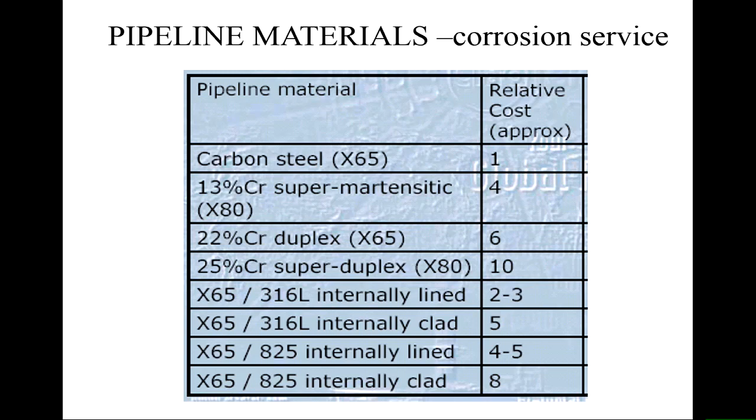So for summary, for the materials development, for UOE pipe, which I'll talk about later on today, steel metallurgy and plate rolling techniques have improved so that we can now produce routinely good quality pipe at X80.

And there are some X100 out in service as well, with excellent toughness, good weldability, and that's normal.

So the last pipeline jobs that were commissioned in the UK for the main gas distribution network around the country, so we could move gas from the ports to where it was being used, those were all commissioned in X80.

Previously, most of the pipes have been commissioned in X65, so we are moving to that grade. However, we don't have much use of anything more than X80.

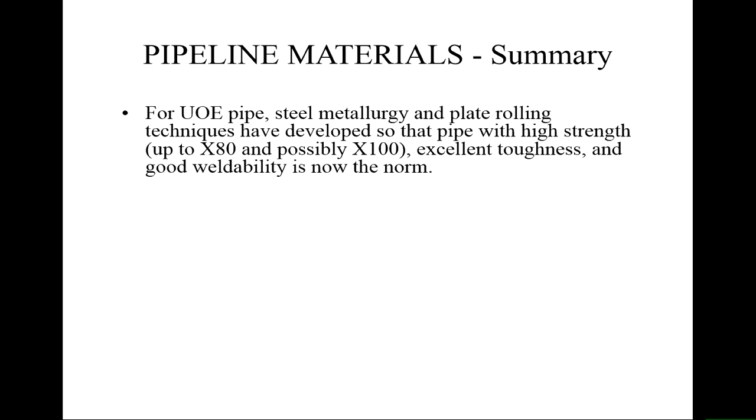I know in Canada and in Japan there are small lengths of pipe with higher specifications, but this is more on the trial stage.

Seamless pipe, quenched and tempered, gives you good high strength pipe for sour service, and you can get good supplies nowadays. The problem with the seamless pipe was always making sure that the pipe wall thickness was uniform.

And because of the way of manufacturing it has been improved, we've got better quality round pipes with good properties, and we'll talk a bit more about that when we talk about the pipe manufacturing route itself.

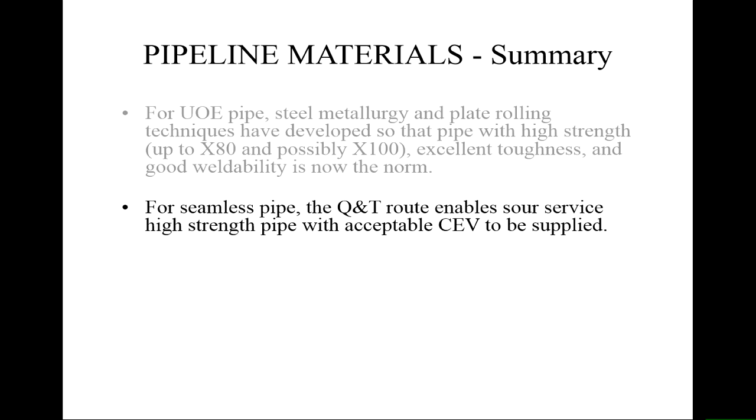High frequency welded pipe, not so much in the way of development, but certainly the grades up to 65 are pretty good. X65 is pretty good.

It's usually used for smaller diameter, thinner wall pipes.

High frequency welded pipe is incredibly widely used in the water industry for the plumbing pipes for distribution of potable water. So copper pipes for the radiators that you can see there will be made by high frequency welding from a sheet.

But it is used in some cases for gas and for oil: spiral pipe. We've got hot rolled and water quenched strip with good strength up to X80, and we can make pipe with good toughness, and we don't have a seam that goes along the length of the pipe. We have a seam that goes on the spiral, which sometimes is useful for addressing that long running crack issue.

So now good quality supplies are available, and it's really looking at how the suppliers have developed the quality control in their process, which dictates whether or not you might choose this.

So again, there are materials that need to be developed, there are manufacturing processes that exist, and there is a quality issue of how well you do that manufacture.

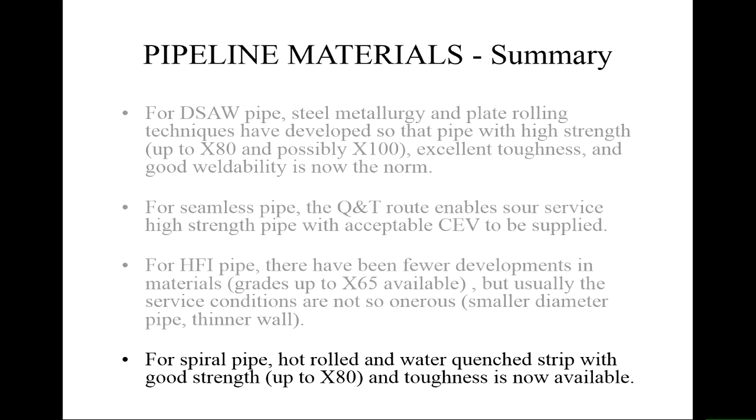So that was sort of the materials development summary. What I want to really talk about today is pipe manufacture.

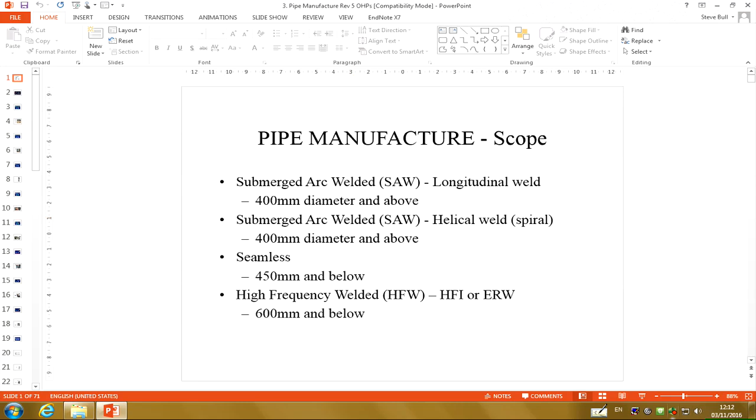So we've got good quality material in strip form, plate form, in billets. How do we turn that into a pipe?

I'm going to talk about submerged arc welded longitudinal weld pipe, helical pipe again by submerged arc welding, seamless pipe, and high frequency welded pipe, either high frequency induction or electrical resistance welding. And these have different uses, largely due to the diameter which they're set up for.

So if you know what the size of your pipe, the diameter is going to be, it sometimes chooses for you which process of pipe manufacture you'll use. But if we've got pipes around 400 millimeters, nearly everything can be used.

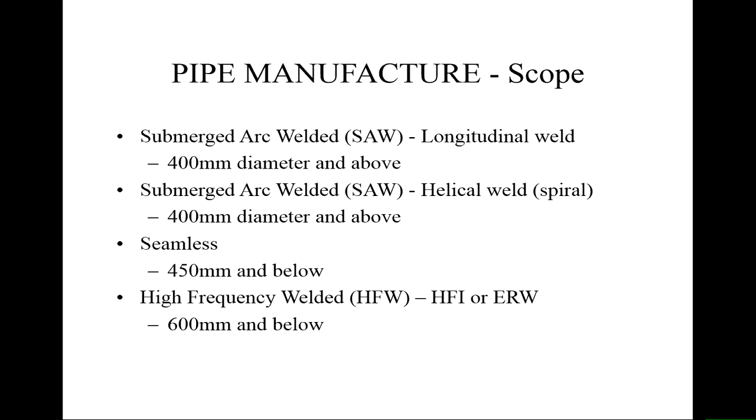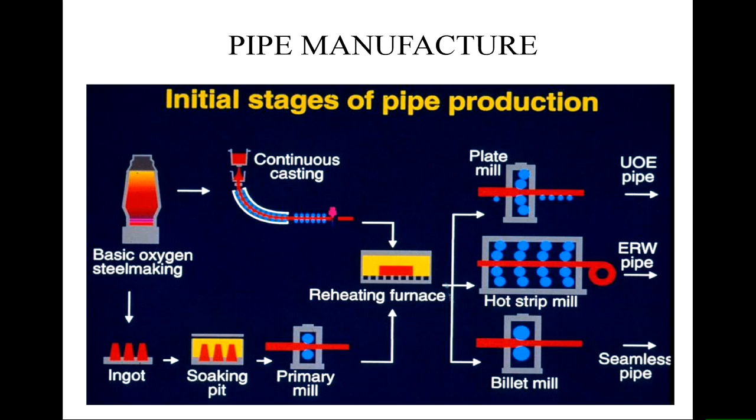So the most common pipe process, certainly for the pipes that we use in the UK, and has been around for a long time, is what we call the UOE process.

And the U and O are indications of the shape that a sheet of metal is put to in order to make a pipe. So we take a basic sheet and we bend it into a U shape, and then we make a full cylinder, that's the O shape. And E stands for expansion. So once it's been welded, we then expand that to plastically deform it a little bit to make it rounder and to generally improve its properties, check that the welds are okay.

So plate comes in from your steel supplier, which has been rolled to the right thickness, and has been hot rolled, cross rolled, and then controlled rolled. So you've got plate with the right mechanical properties for the pipe.

It then goes into an edge planing system where we try to make sure the edges are absolutely perpendicular to the surface, so that we can line them up. If we make it into a tube, they've got to line up perfectly.

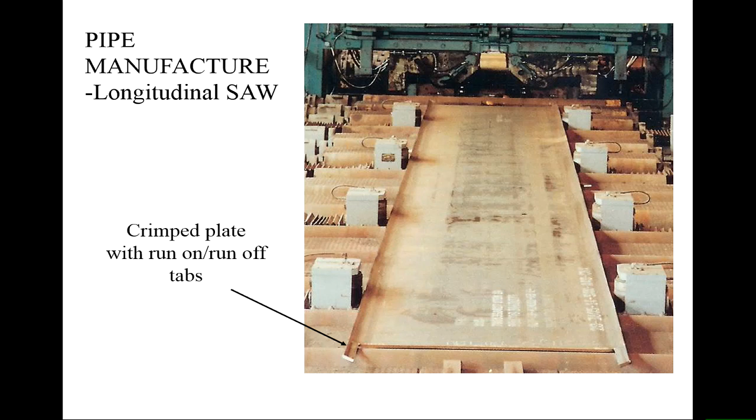Okay, so we've gone through the plate, the edge planing and edge crimping. We're now going to talk about the U-ing process.

So here is the tool, a circular tool, with a flat sheet of steel, in a very long press, 12 metres or 18 metres long. The tool comes down onto the surface and presses, and you get the U shape formed. You can see the runoff tab that's there.

So those two sides should be parallel now. They started off flat and then you've shaped them so it's a U shape. And then you take that tool out, and there's a bit of spring back.

So what happens is when you push it down, there is a recess here, which is the other part of the press. When you push it in it makes this sort of shape, and then when you release it, it springs outwards a little bit because you get a little bit of elastic deformation as well as the plastic deformation. So this tool here is undersized compared to the internal diameter of the pipe.

And you will allow it to spring open a little bit afterwards. And the stronger we make the pipe, the more it springs back, the more we have to change the size of the tool to get the right size.

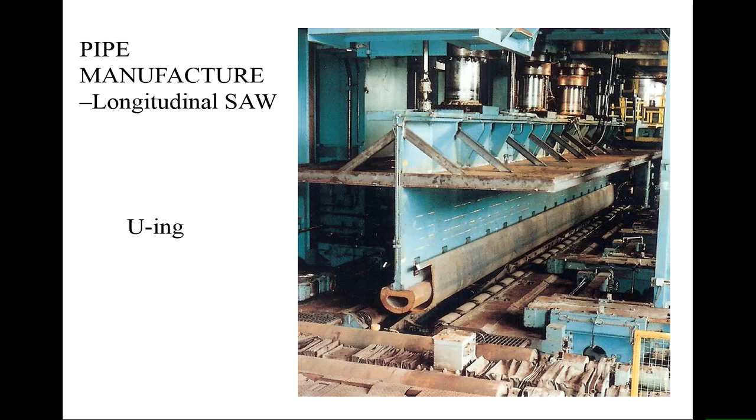So we've made the U shape, but that's only half a pipe. We need to make it into the full pipe, so this is the O press. You're looking along the end here. This is the U-shaped pipe, and the press has just started to actuate.

You can see the runoff tabs here. You're pushing those surfaces inwards, and you can see the crimping is necessary. Lifted that up to make sure this fits inside the tool and will slide round to make the shape. As we push these two halves of the press together, you can see we're getting a more circular shape.

It's going to an O shape, and the edges have come right together at the top here. On the final press, when it's completely closed, this pipe should fit tightly all the way around inside the press. We've got perfect registry here, so no overlap, no angles or anything like that. Of course, when you release that press, there's a bit of spring back, and it'll open up a little again, but under load it should have the perfect O shape in cross section.

So inside the press, is there any temperature? No, this is cold. Cold. You've worked very hard to get thermomechanically controlled rolled steel with good properties, and if you heat it up, you'll get rid of all of that. So you do it cold.

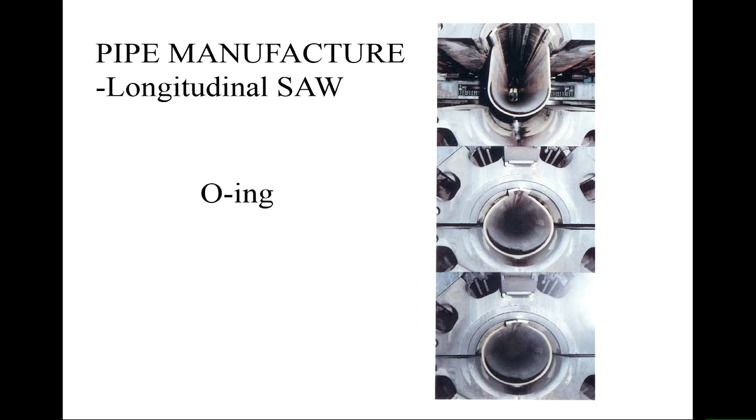Because of the spring back, we tack weld just to hold it in place, so that when we do the main weld, we can make sure everything's lined up properly. We'll have some sort of clamping system around the outside to push things together to allow us to tack weld.

So this is tack welding taking place. You can see the welding process here. There's a couple of welds, and then we've got a big clamp, invisible behind all the equipment there, that's holding it all together. So you imagine you just pull the sides together, clamp them, and then weld at each end. You put the clamp in the middle.

Hopefully, if there's not too much distortion and residual stress, the whole weld, from the runoff strips all the way through the longitudinal position, the metal parts are in contact, and you've got a good chance of one single submerged arc weld joining all the parts completely.

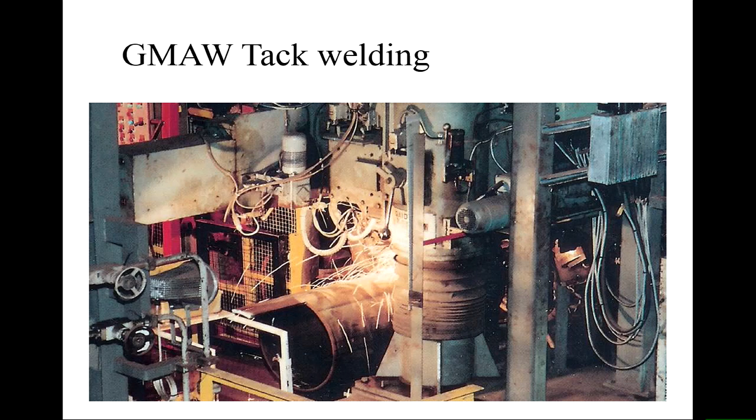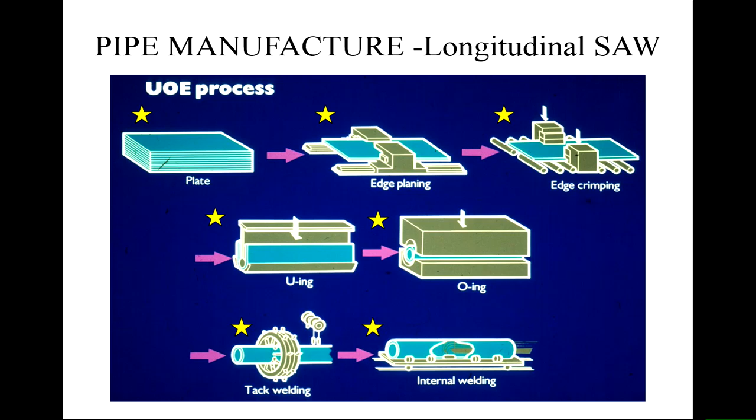So tack welding done, then we've got the submerged arc welding process to actually join it, and this is the bit that makes it gas tight. Here is a submerged arc welding cart going along inside that tube. That's why you can't do very small pipes by this method, because you can't physically fit the submerged arc welding system in it. So there's a picture here of a submerged arc welding process.

So you have a wire, and you strike an electric arc between the wire and the parent metal plate, that's the pipe you're trying to make. That arc, which is a mixture of electrons and ions - the electrons travel and heat up the parent metal, and the ions travel in the opposite direction and heat up and melt the wire.

Then the molten wire particles are ejected and dropped to form the weld pool, under gravity in this case because it's internal at the bottom of the system. The weld metal is then deposited, molten, and it solidifies here.

If you did that in air - any welding process in air - the atmosphere will affect both the stability of the arc and the surfaces you create. The surfaces get hot because it's molten, because you've melted the material. It's at 1500 degrees C if it's steel. It will react with the air to form an oxide, and too much oxide in the weld pool means a very brittle weld, which you don't want. So what you do is protect that.

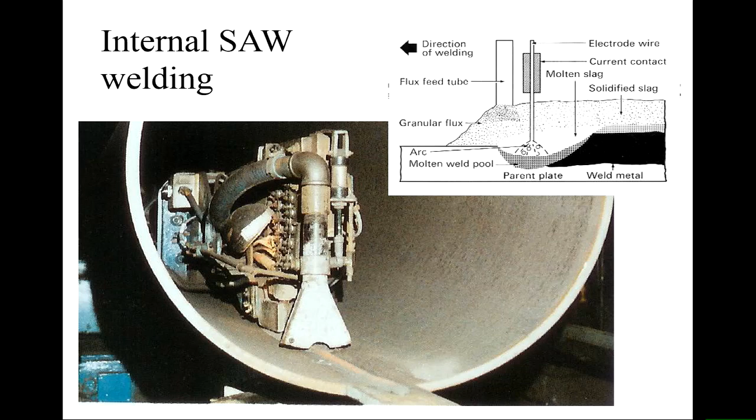So that's the U and O process, and now we've got the thing joined. The next stage is to actually weld on the outside. We've welded on the inside of the pipe, now we want to weld on the outside to make sure its complete thickness has been filled with weld metal. And then we do some testing to actually demonstrate that that pipe is going to be good before it's released.

So again, this is that submerged arc welding process. It's a bit clearer here. These are feeds for the wires, and the wires are coming in, and this is where the welding is actually taking place. In fact, this is just a demonstration picture, so there's no welding, so there's nothing to see.

So here is the flux being applied just ahead of those wires, and here is the vacuum cleaning up the excess flux at the end. This one's got 4 wires for increased productivity. It's a larger system, so the outside welding tends to be done with more wires than the internal system, just purely because there's more space available.

This then just proceeds along. You can see the weld has actually been made here, and it's just continuing along. This has been locally stopped for demonstration, otherwise you might see something happening here, but with submerged arc welding it's not always obvious that it's actually running.

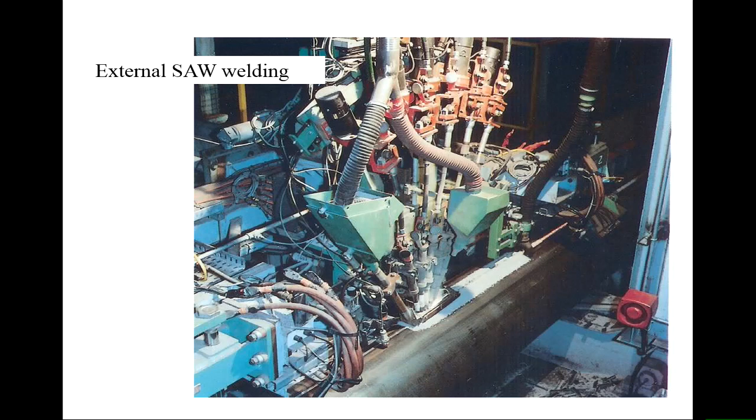Okay, so now we've got, hopefully, a complete weld. Next step is to trim off those runoff tabs and then inspect the surface. There's a question mark - it depends how much you trust your process, whether you trim the runoff tabs off first or whether you inspect first and then trim off afterwards. So if you trust it, you trim. If you don't, you leave them on.

So usually we do an automatic ultrasonic test to verify the quality of the weld, because we're then going to apply a mechanical stress to the system. And what we're doing is the E part of the process - we're mechanically expanding the pipe. This plastically deforms the pipe, and it will relieve the residual stresses in the longitudinal weld, and it will ensure that the ovality of the pipe due to the welding process is removed. So the expansion is a critical part.

If you want to get pipes to match up perfectly, they have to go through this expansion process to be perfectly circular at the end of it. It also enables you to fit into the hydro testing machine, so you pressurize it with water to make sure it will withstand the rated pressure. So each pipe segment that is produced is hydro tested, so that they can guarantee that the pipe will withstand the operating pressure and be therefore of the grade that is required.

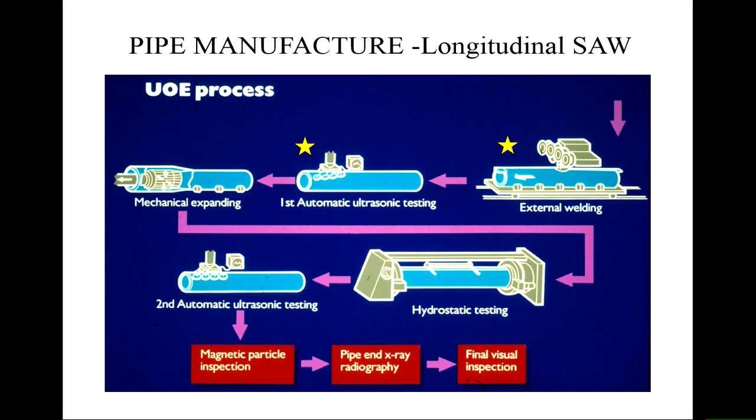We'll talk a bit about inspection techniques later on, but this is an automated ultrasonic assessment. You can see there's lots and lots of ultrasonic cells here. These are often used by pulse echo or phased arrays, so you're making a sound pulse, picking it up here, and looking for changes due to defects and things.

By having those arrays at different angles, you can look at different levels in the weld, so you know exactly where the defect is and how big it is, hopefully, if you do this properly. Lots and lots of investment in doing this, but you have to guarantee every pipe segment going out, so that's what you do.

We'll talk a bit about ultrasonics later on, but certainly for offshore pipes, automatic ultrasonic inspection of every pipe segment is required.

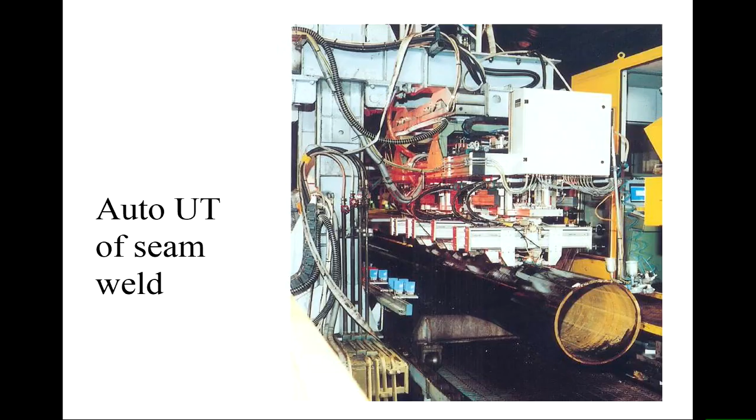Okay, what about expansion? Well, you've got this big internal clamp, and it's a mechanical process and it's cold. What we're doing is just expanding that pipe. We have a cam-driven system which has these outer segments that you can see here, which are just forced apart, and typically we expand to around 1 to 1.5% strain, so we're increasing the circumference of the pipe by 1.5%.

And that will even out any residual stresses due to seam welding, and it will reduce what we call roof topping at the seam weld.

When you weld, because the weld in an arc weld is not totally parallel, it has a V shape, you get different amounts of thermal expansion at the top and bottom of the weld. You will tend to get distortion due to the different stresses that generates, and that will actually lead to a failure if you're not careful.

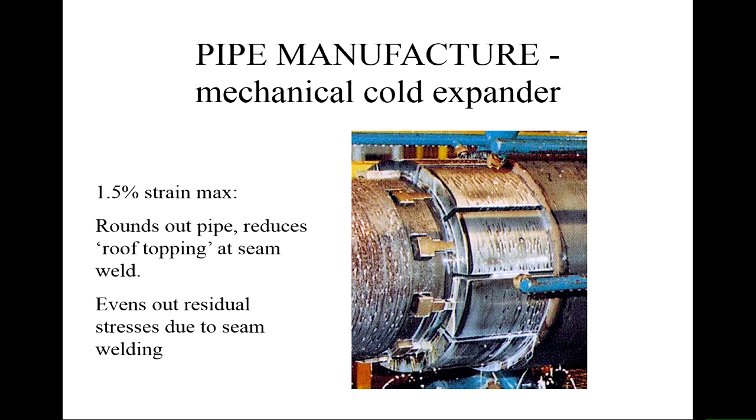And certainly it will make it difficult to match pipe segments up. You want them to be perfectly round, so the expansion process is good for doing this.

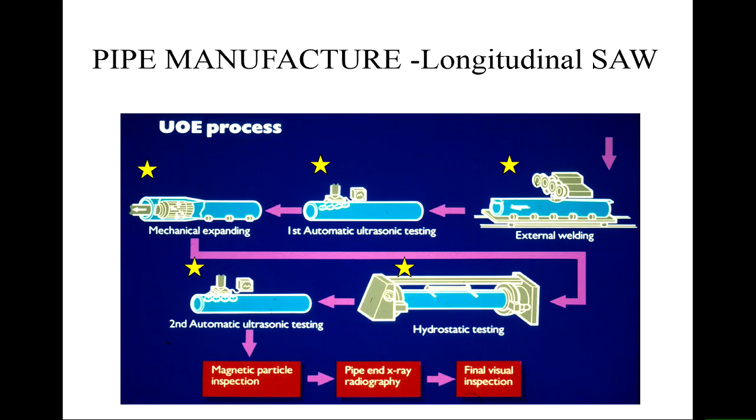So, a bit more testing. Hydro testing we have to do because we want to guarantee the pressure rating on the pipe. Other tests will be done depending on what the requirement is.

So a second ultrasonic test, as I said, for looking at defects, and maybe even visual inspection. The ends of the pipe will be inspected to see that there are no handling defects, defects from putting the hydro testing flanges on, all of those sorts of things.

So mostly for a UOE pipe, we have a 2-pass submerged arc weld, double submerged arc weld, DSAW, one inside, one outside.

The wall thickness is really limited only by the forming capacity of the U'ing and O'ing presses. We could weld much thicker systems, but you need a very big press to actually press a 50mm pipe wall. You wouldn't do it.

Most systems, 17-18mm is about the limit, and actually probably more like 10 to 12mm thickness is more the standard. It just depends on how much you're willing to invest in tons of press.

Cold expansion to about 1.5% maximum strain ensures good dimensions, and that's the first proof test. Often if you badly welded the system and you miss something with the ultrasonics, when you try and expand it, the tube will burst.

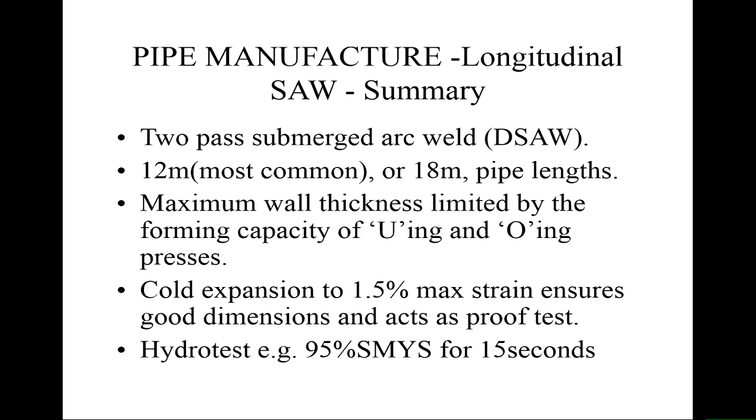So what about the defects that you get? Well, there are defects that come in from the welding process, and we get center and sidewall defects.

This is the internal weld and this is the external weld. This one was done first, then this was done second. At least if I look at that, you might say actually the external one was done first and the internal one second, and that may be the issue in this case, but this is probably a special sample made to show defects. So you've got a defect in here and a crack in here.

So these are center line and sidewall defects. This probably is where this weld is a bit offset compared to this one, so you've not quite got enough heating of the material here. This is the original edge of the material which hasn't actually fused with anything, and that led to some more complex looking cracks.

Sometimes you get a segregation down the middle of the pipe plate from the rolling process, and that can turn into a crack which then runs into the weld. You get those sorts of defects quite widely in submerged arc welding. So what we do when we set up the processes is cut them up and have a look at them, to see if the process you're using creates such defects. Offsetting and bad alignment - things you have control of in manufacture - are often the source of those sorts of defects.

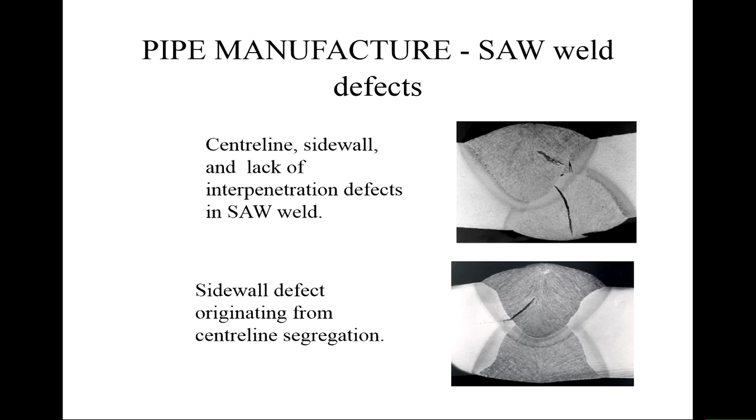Lack of fill. Good weld, bad weld - I think any idiot could see that that's a bad weld. Visual inspection should tell you that you just haven't deposited enough weld metal, that the conditions for welding are wrong.

This is almost like a solidification crack right down the middle of the weld, but you've got this big open hole in the top here. That's porosity, so this could be associated with gas escape. You may deposit weld metal onto a wet surface and the water boils off, and that can create defects in the system. So porosity may be the cause of the defect, or it may be an effect of the defect - it's difficult to tell in these cases. That's why I say an associated defect, because what came first? Difficult to say.

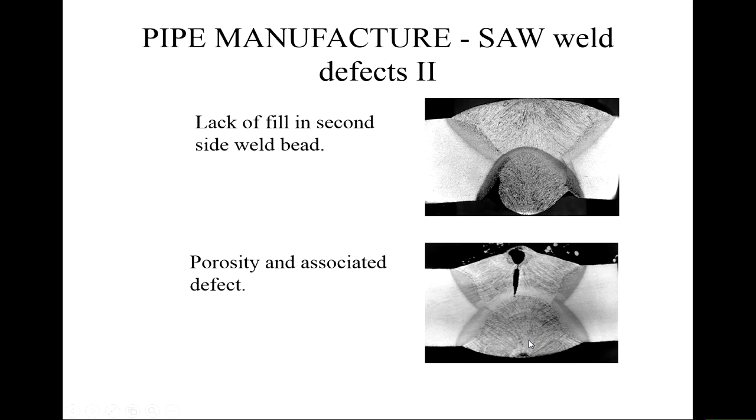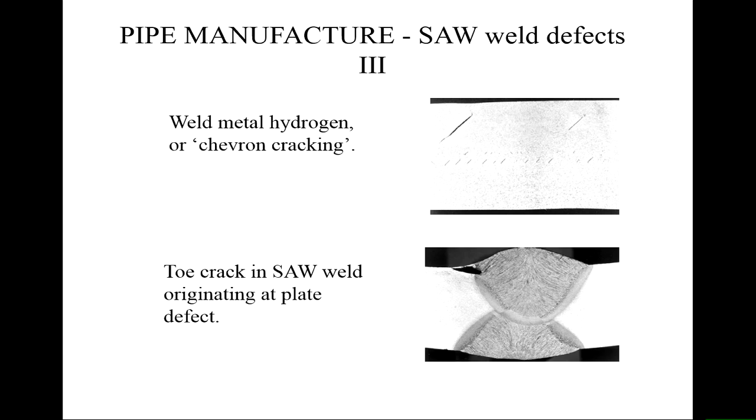That can be quite a serious failure. This is the sort of thing, if it happens, that causes a burst during the expansion process or during the hydro test. It's one of the big causes. And it usually means that somebody's set the power settings incorrectly in the submerged arc system, so that we get incomplete penetration.

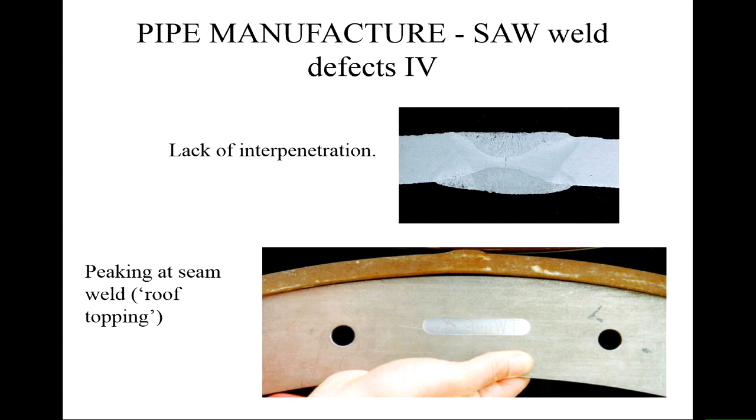The lack of penetration, with MPI can we find that out? With magnetic particles, no. You'd have to use some sort of internal inspection system. With radiography, it's almost impossible to see because you get this line there. You might, if you were very lucky, get it lined up perfectly with the source and you would see it. With ultrasonics, you can bounce those ultrasonics off at different angles here, and if you had the right ultrasonic array, you could pick that up. But you've got to have the right array, and you've got to have the full penetration covered in that system. So in principle you can do it, but it doesn't always happen because people haven't got the complete coverage on their analysis systems.

Spiral pipe is a little bit more complicated. Actually, spiral pipe is quite common. If you ever look at the inside of a toilet roll, the cardboard inner is a spirally wound tube. So making cardboard tubes for general use is done by a spiral manufacturer, and the processes are worked out very well for these small items with material that can be glued together.

Doing it in steel is a little bit more complicated. So you can see the process here. You start off with a coil of steel, and you uncoil it and straighten it. These rollers are driven at different speeds, so we can control the speed here and the speed here, and that means we can put tensile stress. We can stretch this material. We've got rollers here which can also plastically deform it, so we make it slightly thinner, so we cold roll it and give it good mechanical properties.

And then we'll have some sort of inspection process, and you could cut out, if you like, bits of the strip that aren't very good and weld them back together. But hopefully you can ensure that the quality of the material is good enough that you don't have to do that. Then you have alignment rollers here.

And then you have a set of complex rollers that turns this straight strip into a tube. The diameter of the tube depends on the angle here that we have this line with respect to the tube. So by changing this angle and knowing the width of the strip we're using, we can fix the diameter of the pipe. So you have to be able to rotate the welding part of the process with respect to the strip part of the process and control that very precisely.

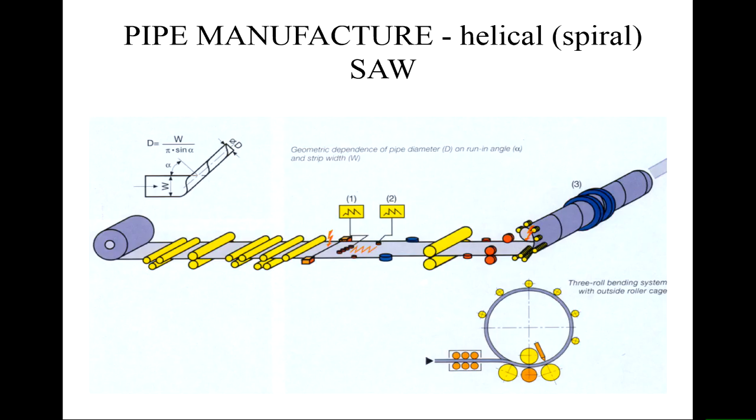And then this whole thing is going along here, and then you can have some sort of heat treatment, inspection stages and things like that further. And here it is happening in process.

You might have multiple stations of pipe, making a certain length, pushing this pipe through from the strip feed, but you'll also have to have the ability to collect a certain amount of pipe in your manufacturing process. The length over which you can do things will depend upon the setup in your factories.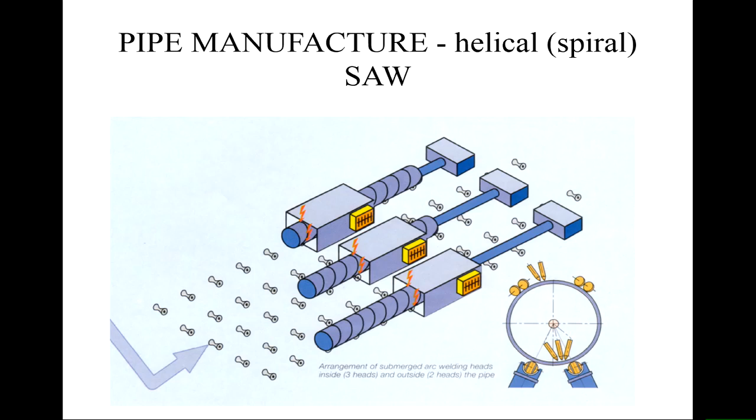I would say helical wound pipe was regarded as inferior to longitudinal welded pipe because it was difficult to set up. Many people in the gas industry called it water pipe as a term of disdain, because if water pipe leaks it's not so serious - it's a lower quality product. The real problem was setting up the process, because it's much more complex.

You've got to get your alignments much better, with all these rollers and things. You've got to integrate that with the welding processes. And you had poor dimensional control and roundness, and it wasn't so easy to achieve the same quality as with UOE pipe.

Now the pictures I showed you were quite old. If you go to a modern helical pipe mill, there's a lot more computer control, a lot more sensors, and it generally looks much more of a high quality manufacturing process, and indeed the product now produced is much more high quality. I think if you have a good pipe mill, you can produce equivalent quality pipe by these processes.

Why am I talking about this in so much detail? Because if you're going for really big pipes, diameters of more than a metre, you're often limited to helical pipes because you can't easily press those pipes by the UOE process - the loads are too high for very thick walls. So once we see these very large diameter pipes, it's likely to be a helical pipe. Not essential, but likely.

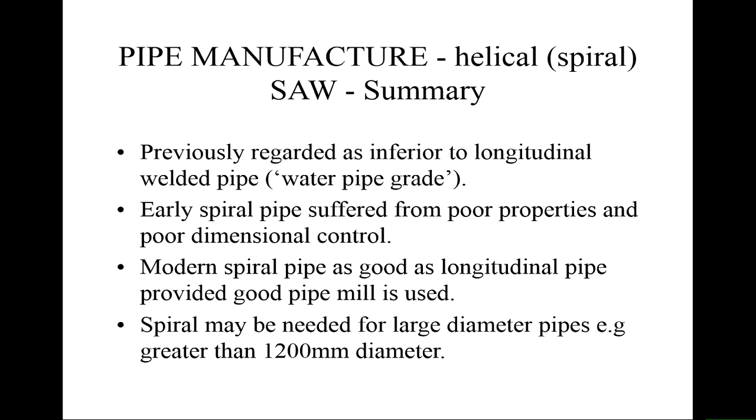There are some special cases - small runs for things like pig traps, where you might want a large but short section of pipe. You can use what we call a 3-roll forming system, taking a sheet between a larger central roller and 2 smaller rollers. If you roll them, rather like pulling a sheet of paper off the edge of your table, you get stresses set up and it will naturally curve. This is the engineering version of that, and you can make yourself a circular system.

So for short lengths, you can actually make pipes this way. For very heavy wall pipe, it might be the only way you've got for doing it. If you want something more than 28 millimetres, which is quite rarely used, you might want to do that. For short runs, as I say, for pig traps and things, you might want to use this process.

Also, if you want a pipe which you're then going to bend in an induction bending system, you might want a heavy wall pipe made by this process, so that by the time you've bent it, the minimum wall is maintained and you've still got good mechanical properties. We'll talk a bit about induction bending later in the course. So this is kind of special, but it's very similar in size and dimensions to some of the things you can get from spiral wound pipe systems.